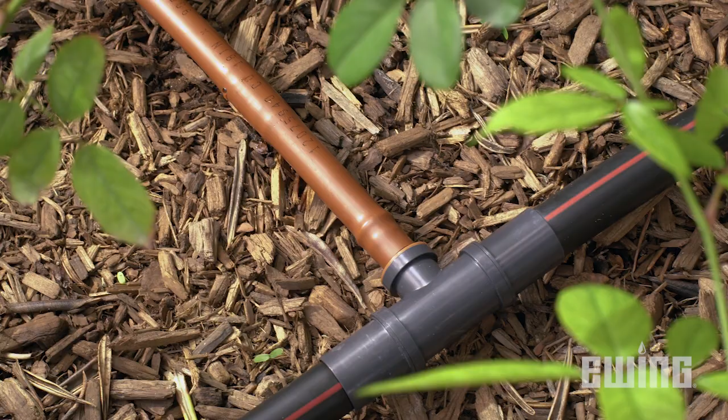One of the more popular and efficient ways to irrigate trees or dense areas of vegetation is to use drip line. As with any irrigation system, it's important to understand product operating requirements and limitations when creating your design. This is also true when troubleshooting an existing system.

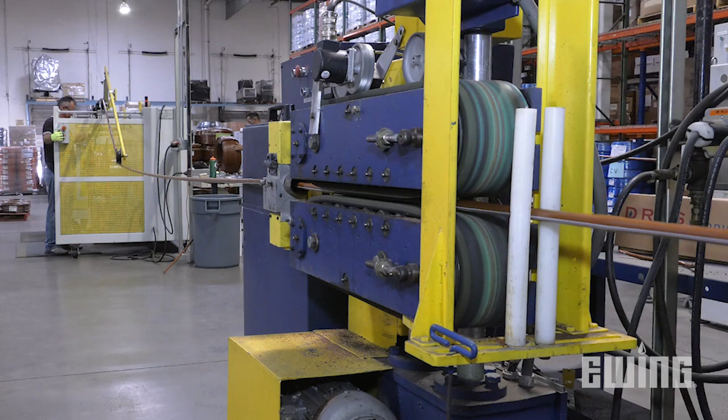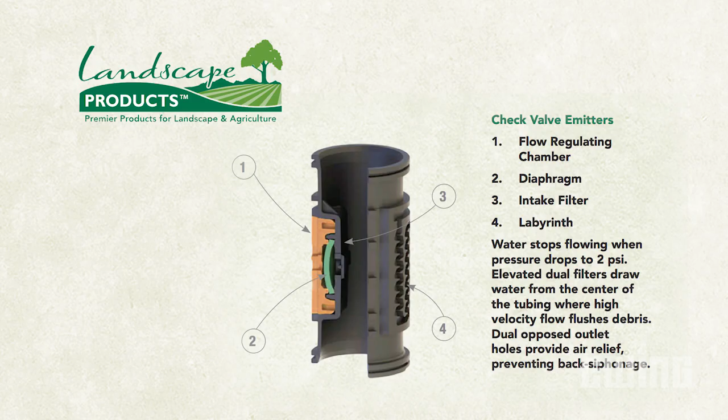Drip line is polyethylene tubing with incrementally spaced internal emitters installed during the manufacturing process. The 17mm EZ-ID CV drip line from Landscape Products uses pressure compensating emitters that keep flow consistent even as pressure fluctuates within an operating range. Each of the emitters is also equipped with a check valve to prevent water waste and back siphonage that might clog emitters.

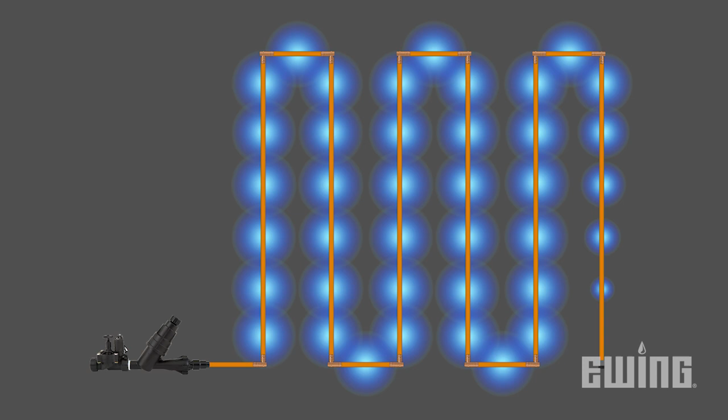A common challenge when installing drip line is exceeding the maximum run length specified for the drip line used. If the run is too long, emitters toward the end of the line may not function properly. This is usually due to a lack of water flow, pressure, or both. When troubleshooting drip line, there are a few important factors to consider: the static pressure and available flow from your water source, the emitter gallon per hour output, and emitter spacing of the drip line used.

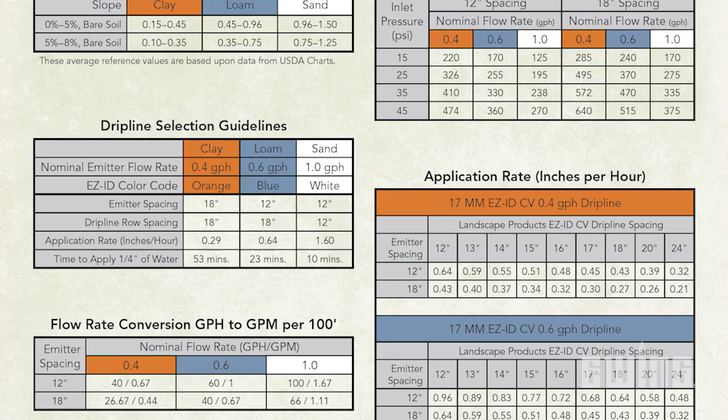Begin troubleshooting by referencing the manufacturer's product specifications to determine the maximum run length possible for the drip line being used. For example, if you are troubleshooting Landscape Products 17mm EZ-ID CV with 1 gallon per hour emitters spaced at 12-inch intervals, you can achieve a maximum run of 195 feet with 25 psi of inlet pressure. If you determine that your run length exceeds this distance, then you can take steps to remedy the situation. Most likely the zone is trying to deliver more water than the tubing can carry.

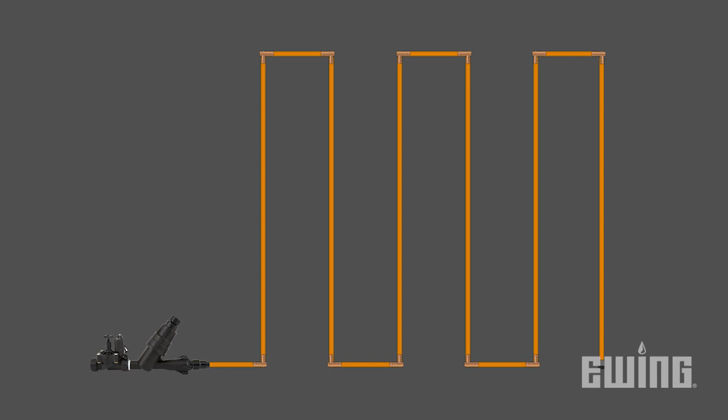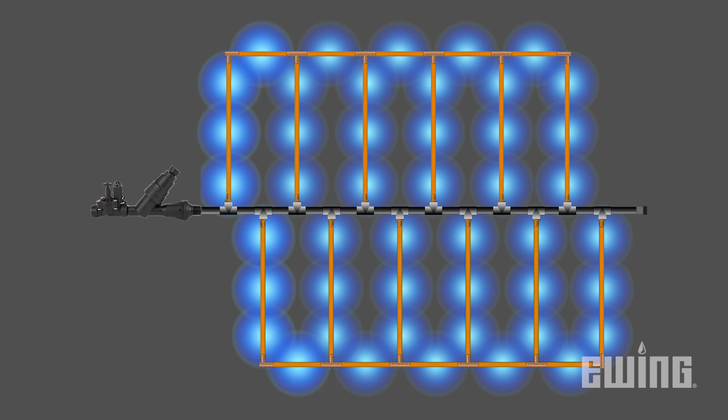Outside of splitting the run into two separate zones, the solution may include changing the layout to a center-fed design with a larger sized header supply line. The larger supply line will increase the flow and pressure to the zone, allowing for a longer run. The other option is to reduce the overall output of the zone by moving to a wider emitter spacing or swapping out the 1 gallon per hour drip line for a lower gallonage product. If you choose to reduce the output, be aware that you will need to increase the zone's runtime to compensate.

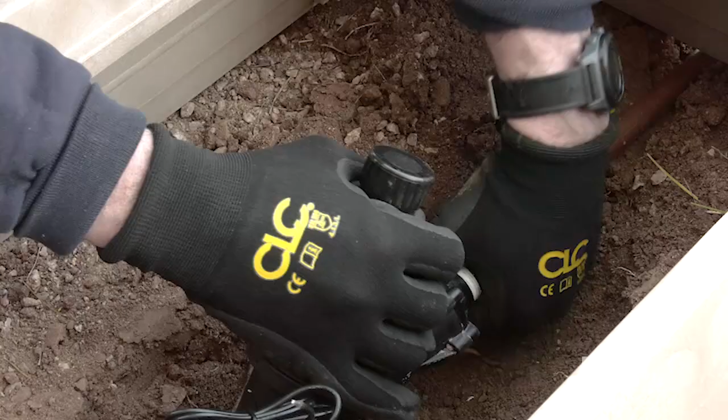If your run length is within product specs, then you likely have a pressure problem. To verify this, use a pressure gauge to take a measurement at the beginning of the run and at the emitter with diminished output. The pressure at the beginning of the drip zone should match the rated output of the regulator you have installed. At the emitter, the minimum pressure required to open the check valve on EZ-ID CV drip line is 12 psi. Remember that the dynamic pressure in the line will drop incrementally as a result of friction loss. The run length charts are designed to account for this friction loss and consumption of water.

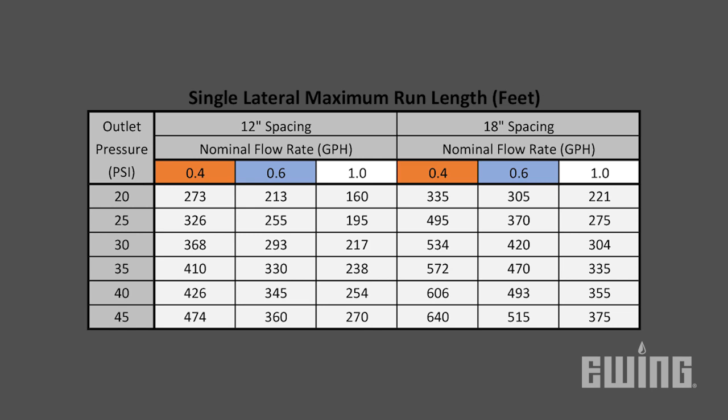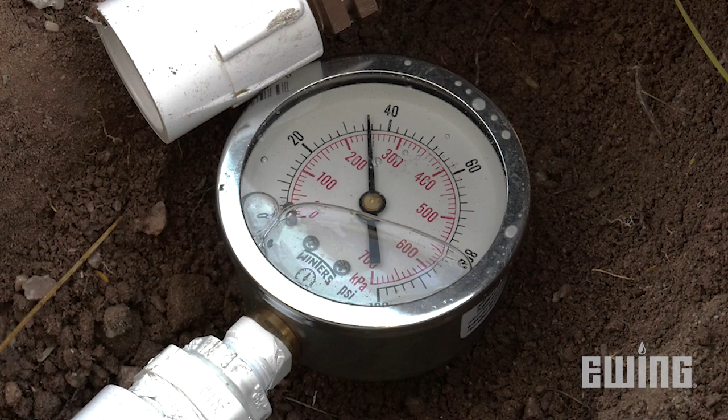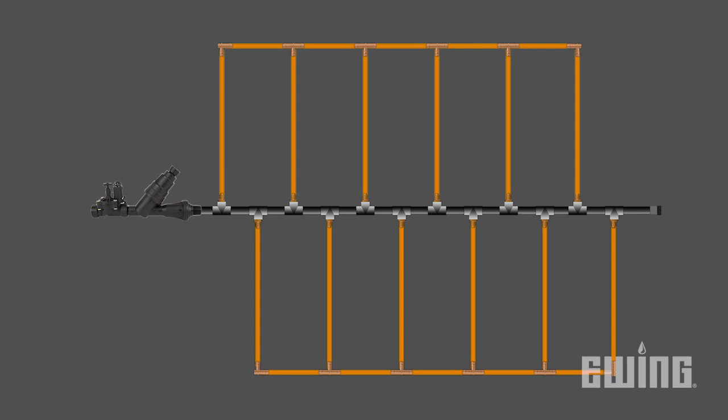If your beginning pressure is too low, you may not have enough pressure to open the check valves on all of the emitters in the line. If the site has sufficient pressure to begin with, you could install a pressure regulator with a higher pressure rating to resolve the issue. Adding a header line and center feeding the zone may also be an easy fix. Although drip is considered low volume and lower pressure, you must apply the same hydraulic principles as you would with spray and rotary head designs. When troubleshooting check valve drip line challenges, always begin with an evaluation of the pressure and hydraulic details of the installation.